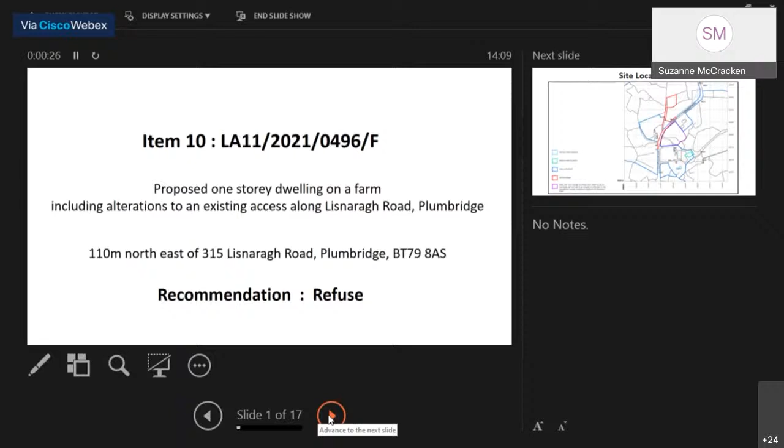Members, this is item 10. It's LA11 2021 0496F, the proposed one-story farm dwelling on a farm, including alterations to an existing access along Lisnaragh Road, Plumbridge, 110 metres northeast of 315 Lisnaragh Road, Plumbridge, and the recommendation is to refuse.

This first slide shows you the location maps submitted with the application. The site's outlined in red here. This is Lisnaragh Road, and the farm grouping and active business is located and addressed down here, 318 Lisnaragh Road. These are existing buildings on the farm.

These are just a couple of photos from the application site, taken up from the access, just to show you the topography of the site and some of the screening around some of the boundaries. Some low, old stone walls there as well.

In terms of the policy context, the site is within the AONB and in proximity of an archaeological site and monument to the northeast. You'll see there the policy context that we've assessed the application against, detailed further in your reports. The consultees have all returned satisfactory responses, and you'll be aware, members, that there has been one letter of support with this application.

So as it's a proposed dwelling on a farm, the main policy consideration we'd be looking at this under is obviously PPS 21. From the information to date, we've been able to assess that the farm business is active and established. There have been no dwellings or development opportunities sold off. However, there is an issue we have encountered with the visual linkage and the clustering test, which we feel the proposal doesn't meet.

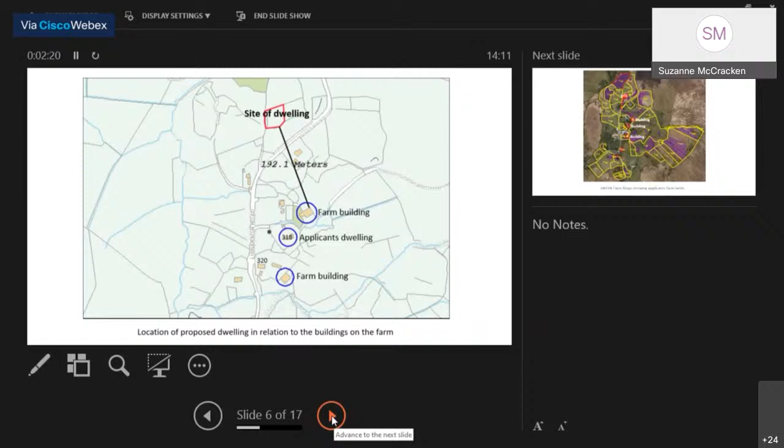Looking at that in a bit more detail, you can see here the location of the site, and then we have the established buildings on the farm here, just over 190 metres further southeast. We have another farm building down there. To give you an idea of the farm holding, that's just the farm maps, outlining the extent of the holding. We've outlined there the existing buildings, and then the proximity to the site.

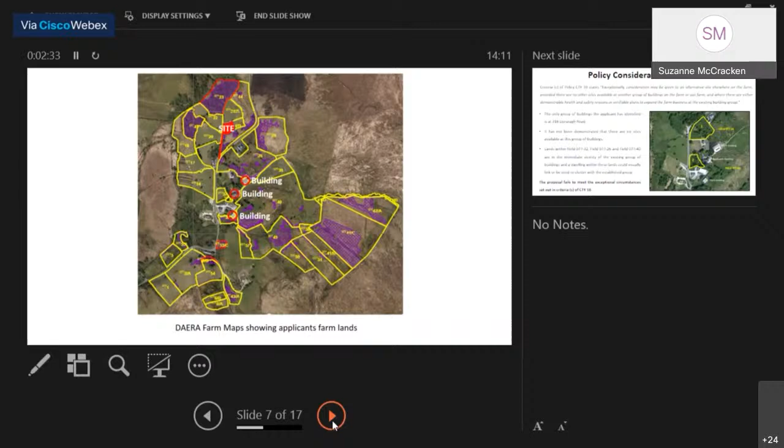So when looking at CTY 10, criteria C does say that exceptionally consideration may be given to an alternative site elsewhere on the farm, provided there are no other sites available at another group of buildings, or either demonstrable health and safety reasons or verifiable plans to expand. So the only group of buildings the applicant has identified to us are those at 318 Lisnaragh Road, which are here. And the officers have considered that there are possible alternatives.

We've outlined here the first site. Now the applicant felt that site was an unacceptable option because they had concerns with the road, speed of the road and visibility splays. Roads have confirmed that splays of 2.4 by 70 could be provided, but that would obviously require a separate application to further that. Again, this site here below, number 2, would also visually link cluster with existing buildings.

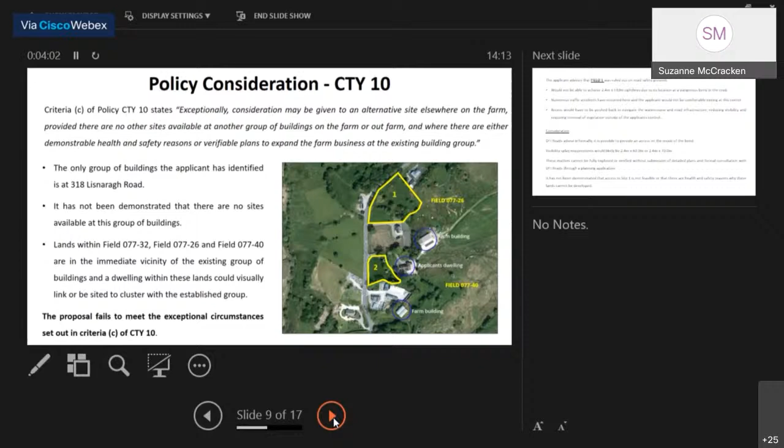In terms of integration, the site itself does actually integrate. It's very well screened travelling along this narrow road. There's limited views of it. So we feel it does comply with CTY 13 and 14. And it's also within the AONB. Because of the scheme the agent is proposing, which is quite a modest, low dwelling, I think it's just about 4.6 metres high, you can see that the visual impact will be quite minimal.

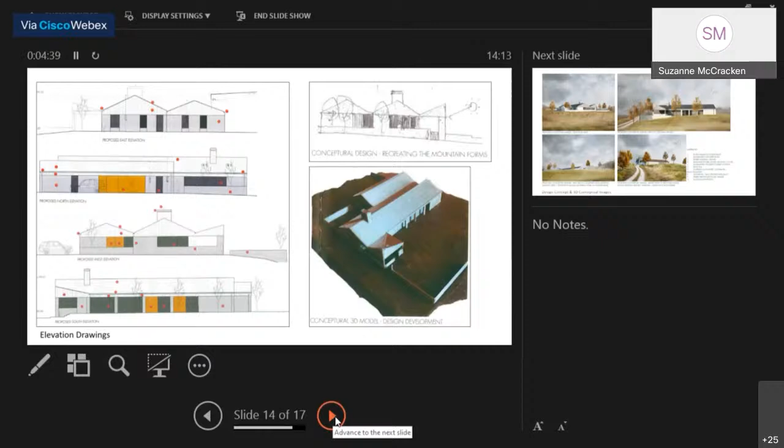So here are just some of the concepts and elevational drawings submitted with the application. We have no issue in terms of the ability for that specific site to integrate, other than the fact it doesn't meet criteria C of CTY 10, that it's not sited or clustered with an established group of buildings on the farm. Other policy considerations: the roads issues, no issues.

Historic monuments are content. The archaeological monument's not scheduled, no issues of flooding, and again PPS 2 issues. Natural Environment Division are wanting to condition restriction of external lighting. It's something we would probably need to consider the necessity of, really.

Again, in terms of the letter of support, it highlights the problems with the 2 alternative sites, and that the integration of the site and the sensitive design is acceptable in the AONB. So on balance then, members, we have refused it for those 2 reasons: principally CTY 1, and also not visually linked or sited to cluster. So happy to take any questions. Thank you.

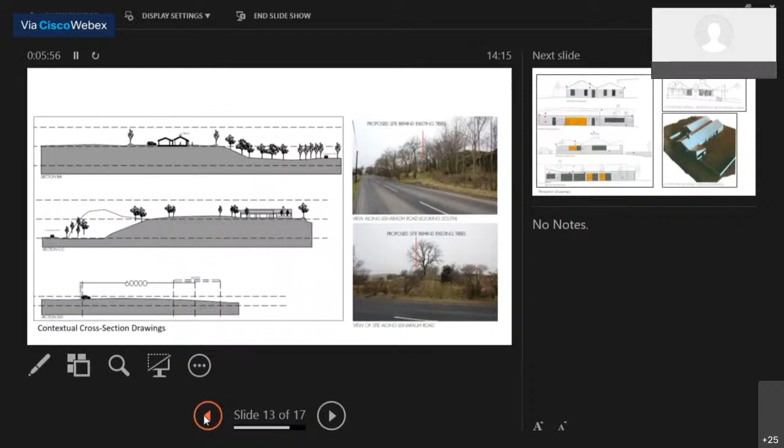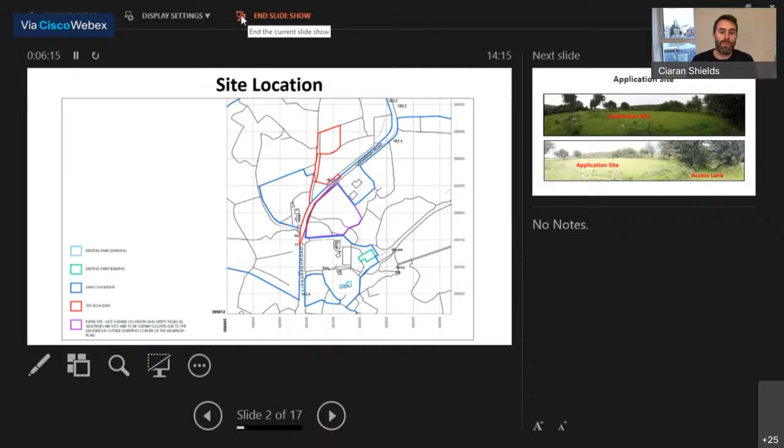The site is located on a large sheep farm which stretches across both sides of the Lisnaragh Road. The applicant is the only son who helps out considerably on the day-to-day activities of the farm. The farm meets the requirements and legislation for a new dwelling, as it is an active farm and there's been no other dwellings or applications submitted.

We have addressed all consultee issues and concerns through the application process, including DfI Roads and an ecology report as requested by the NIEA. We walked the site or the farm with our clients and applicant to review the potential options.

In the middle of last year, the most obvious alternative site, as outlined by the case officer, is noted as 077-26. Unfortunately, we feel that this site is located on the dangerous outside bend of the road, which the applicant felt would be unsafe to create an access. The other issue is that they don't have full control of the hedgerow and trees to establish the full length of the sightline required towards the Dunnamana part of Lisnaragh Road.

The other issue we felt is that if we were to create these sightlines, significant tree and hedgerows would need to be removed, increasing the speed again, which we felt would not be safe. As outlined by the case officer, there was an alternative site proposed as part of the application process on their behalf, which was the field in front of the existing farm dwelling.

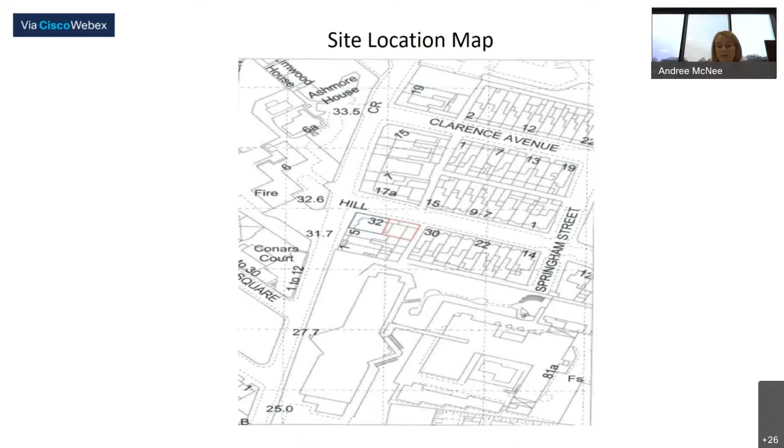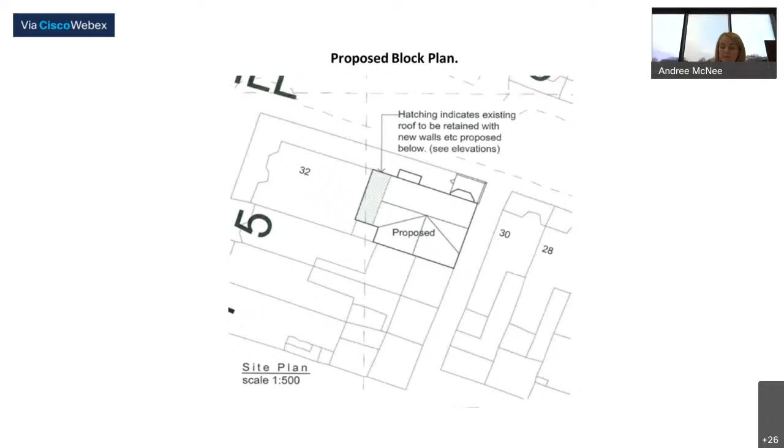This is the proposed block plan, and the built form proposed is over the majority of the site, except for a small area between number 32 and the rear return of number 5 Northland Road. The hatched area shows part of the existing adjacent building, which will be incorporated into the proposed apartments in this proposed development.

During the processing of the application, a total of 7 objections were received from residents of Clarence Avenue, and the following issues were raised. In relation to parking, accessing and servicing, the objectors raised existing parking problems in Lawrence Hill. Streets in the locality are already at full capacity. There's no regard for residents in Lawrence Hill. Residents already suffer from excessive vehicular traffic problems, and this would exacerbate the situation.

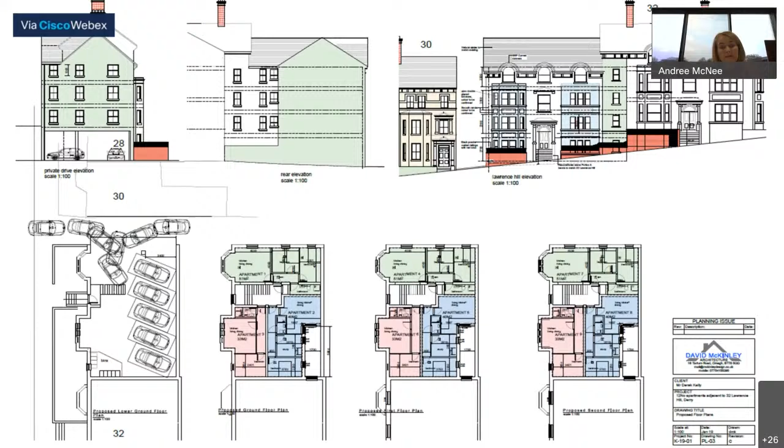But as I said, this was not formally submitted with all the amended P1 and P2 forms, and no consultations, neighbour notification, or objector consultation has taken place on this. So the decision today, if members make a decision, will be based on the plans as previously detailed.

In conclusion, officers consider that the proposed development of 12 apartments is contrary to the Area Plan, PPS 3, PPS 7, PPS 7 Addendum, and PPS 15, as no revised drainage assessment has been submitted to date. All material considerations have been taken into account, including representations and consultation responses received.

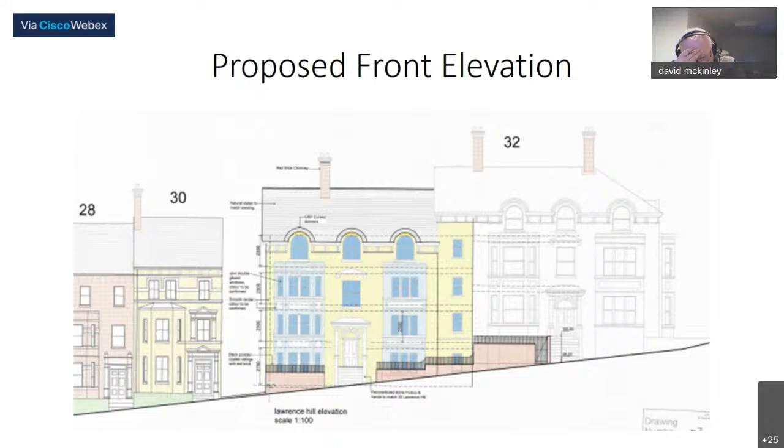Point 7, that was the email in relation to the in-curtilage parking. We've increased the layout - sorry, we've increased the light well at the back. That's the old layout, but the newer one was the email this morning that caused a little bit of confusion. The only reason I asked for that this morning was that it wasn't uploaded, so you wouldn't have seen it unless we'd asked for it to be put up.

So I believe there's protection visually that nobody's overlooking. We're looking at number 5, I think it was - the property behind has no development beyond the depth of 32. There's apartments on 2 more gardens over, which would be 4 and 3, probably 3, and it looks directly across at it, but there's enough separation distance for that.

Number 8, that's the flood risk assessment. We have PD come back, and they said there's no sewer connection, even though we're currently connected. The flood risk assessment I carried out was a simple one, in that the whole site is hard - there's no soft areas to soak up water. So strictly speaking, we're not loading the system any further than what's currently there. That wasn't accepted, and I currently have an engineer working on that.

We have a 154 application made a couple of months ago. Excuse me, Mr. McKinley - yes? That's your 5 minutes up now. Okay, that's fine, thank you.

Okay David, have you much more? How long? No, basically just to conclude - I think there was mentioned the B1 and B3, which is part of your - look, we're in a flat zone, it's designated for that. We're outside the conservation area just, so we could obviously build nearly anything you wanted to.

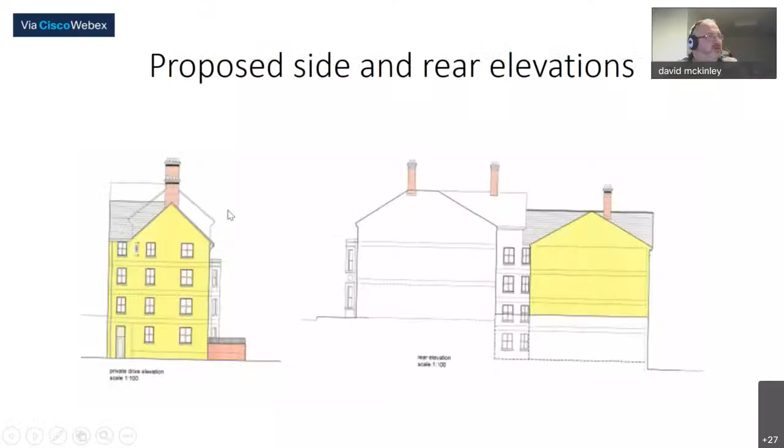There's 3 apartments I think you're referring to, Ms McClintock - the 3 apartments next to the alleyway down the side. The 3 windows as living space look out the front, and all of the apartments look out the front towards Lawrence Hill. The other 3 windows, 2 of which are bedrooms, have a separation gap of about 4 meters, where the bin store is as well, shown on the screen. They're looking out into another gable, but that gable is more or less 4 meters away from our gable, if that makes sense. But the living space is certainly looking out the front of the building, and that's concurred on 2 of the other apartments.

The 3rd apartment is slightly more disadvantaged, but it has its own internal light well, which the boundary wall climbs to just about the height of the ground floor, about 3 meters up, and thereafter you're looking out over the property to the rear, but you're 2.5 meters in off that boundary wall.

That's exactly what Andree's highlighting there. Only the newer proposal would have it much bigger.

Now, what we're looking at is maybe a house of multiple occupancy buildings, and it seems, Andree can correct me if I'm wrong, there's been a few down Lawrence Hill which seem to be accepted, perhaps more so than apartments. Apartments to me is more homely and presentable, maybe for people working in the city, whereas HMO is perhaps for people passing through, our college and so on. So we've looked at a mixture of that to reduce the amount of apartments, and that's where we are at the moment, halfway through it.

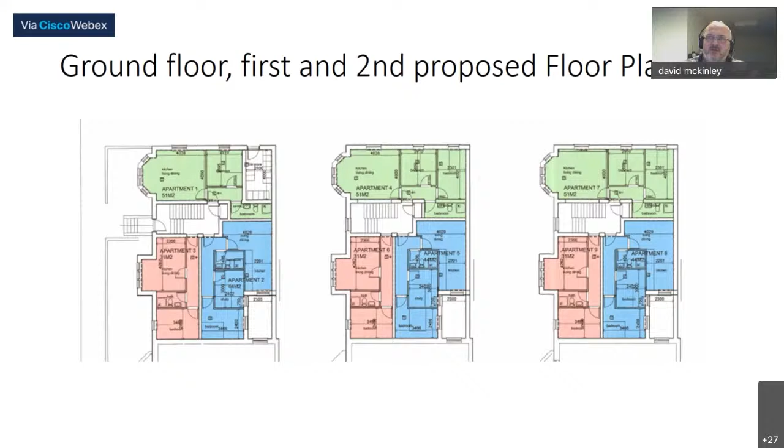Okay, any other questions? I just want to say, it was mooted that we're going to maybe defer this. If there's going to be a proposal to defer it, could we maybe do it now rather than talk it to death and then have a deferral?

So, Chair, I'm content to propose, if you're looking for it now, that we defer and just get clarification from David whether the planning meeting at the start of February or the planning meeting at the start of March would allow him the appropriate time frame. I'm content to make a proposal we defer to give the agent time to get the information. I'm easy, it's either the February meeting or the March meeting, whatever David feels would take the burden from the agent, if that's possible, Chair. Thank you.

I'm not hanging about on this one now. If I can get it done straight after Christmas, I'll do that. The flood risk, well, I'm going to take holidays in the middle of that period. I could aim for the 1st of February, but it might be better if I can get it in prior to that, I will do that. Worst case, 1st of March, but I will be aiming myself for the 1st of February.

Sorry Chair, can I step in here? Yeah sure, Maura. I'm just mindful, Chair, there's 12 reasons for refusal, and there's some issues of principle here that aren't just technical issues. In 2 months I'm not sure what changes that will incur, and I wouldn't mind if Andree stepped in to highlight, maybe if there is a resubmission, that would be subject to a separate application. But in terms of what we've got here, we're content if members decide to defer the application, but there's a significant amount of reasons for refusal here to be overcome. Thanks.

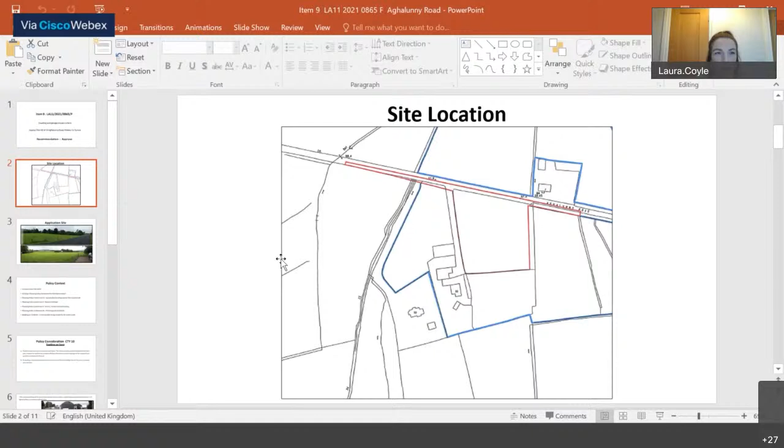As you can see from the red line, it's a roadside field. These are the buildings located on the farm within the blue land. This is some photos of the application site when viewed from the roadside. As you can see, the site's slightly lower than the road level. The roadside boundary there is a post and wire fence, and we have a mature boundary along here and along here to the rear as well.

So this is just the policy context under which this application was assessed, which includes the Strabane Area Plan, the SPPS, PPS 21, PPS 2, PPS 3, and PPS 15, as well as the design guide. So first, in establishing the principle of a proposal, it's assessed under policy CTY 10, dwellings on farms. The farm business has been in existence for at least 6 years. Though it hasn't claimed payments in each of those years, information has been submitted which officers have considered, and we're content that it proves active farming over that required period in accordance with Part A of Policy CTY 10. We've also carried out a history search of the farm holding, and we're content that no development opportunities have been sold off from the farm holding in the last 10 years, in accordance with Criteria B.

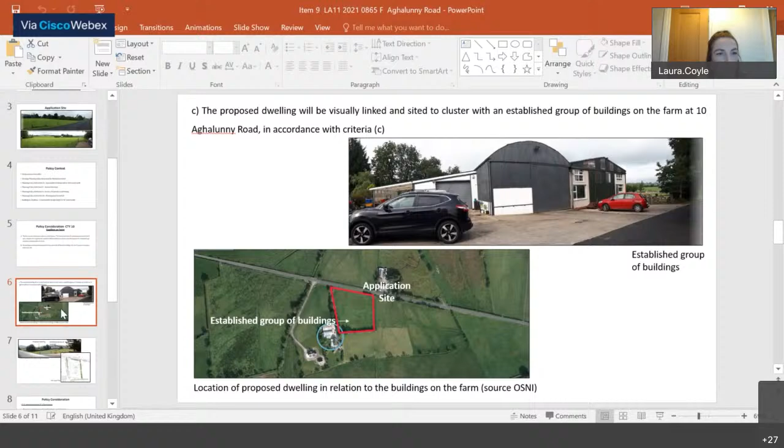Again, this is just some other images. This shows the small farm group from the road, the proposed layout of the proposed dwelling and the garage to the rear, and then the field in which the dwelling is proposed to be located.

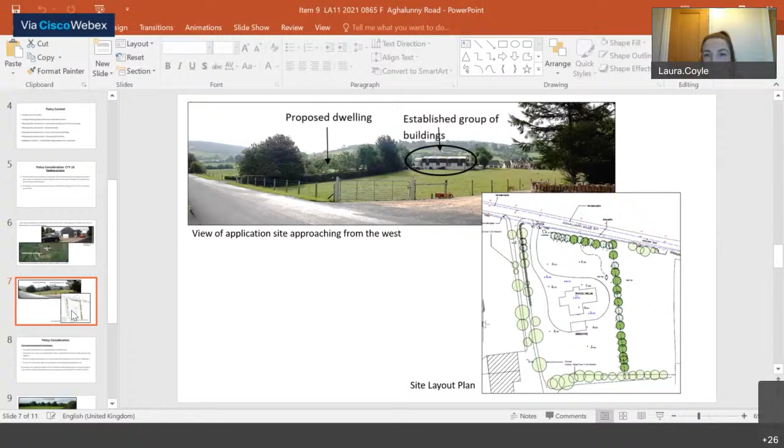So just to summarise, we're content that the proposal complies with Criteria C of Policy CTY 10, and that the proposed dwelling will be sited to visually link and cluster with a group of buildings on the farm.

The proposal is then considered further under Policy CTY 13 and 14 of PPS 21. There will be some views of the site when travelling along the road when approaching the site, mostly in both directions. But there is some new tree planting proposed along the eastern boundary, which officers consider will help provide integration. Also in terms of design, it's a fairly modest dwelling, and we consider this to be an appropriate rural design, as you can see here on the elevations.

Therefore, we would be content that the proposal complies with Policy CTY 13 in terms of integration and design, and Policy CTY 14 in terms of rural character, whereby the proposed dwelling is sited in a group with the farm buildings.

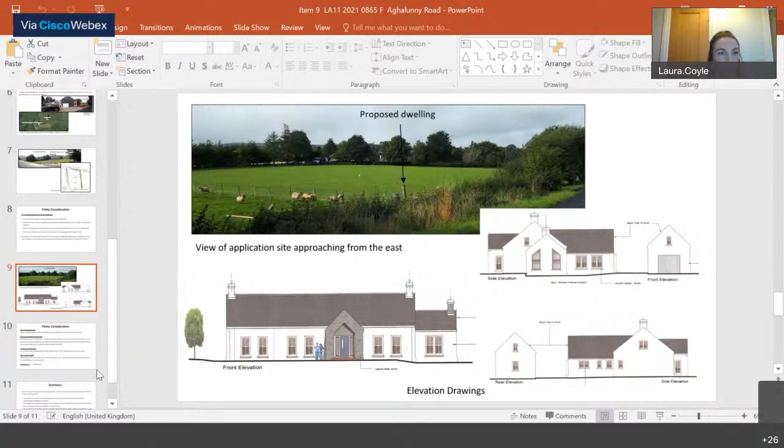Our other policy considerations include residential amenity, site access, any potential flood risk and natural heritage. We've carried out consultations on all of these issues. In terms of amenity, we don't have any concerns. There may be some disturbance during construction, but this will be for a limited period.

DFI Roads have advised that the survey doesn't show the fence line to the east, which will need to be stepped back. However, the visibility splays are annotated on the drawings, and we've provided a condition in regard to that fence line.

We don't require a drainage assessment due to the scale and nature of the scheme, and no areas of flood risk have been identified on the site. NIEA have provided advice in terms of natural heritage, but there are no watercourses abutting the site, and therefore we're content in that respect.

We also haven't received any representations in relation to this proposal.

Just to summarise then, we're content that the proposal meets the policy provisions of the Strabane Area Plan, the SPPS, PPS 21, PPS 3, PPS 15 and PPS 2. The proposed dwelling is located on an active and established farm business and sited to cluster and visually link with the group of buildings on the farm. It's of appropriate design, it will integrate into the countryside and will not erode rural character. It will not adversely affect residential amenity, and it will not prejudice road safety, materially change any flood risk, or affect any designated sites or other natural heritage interests.